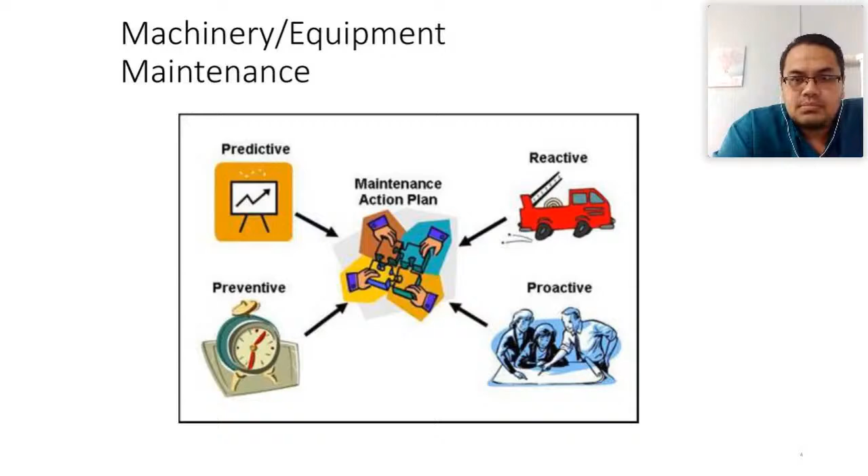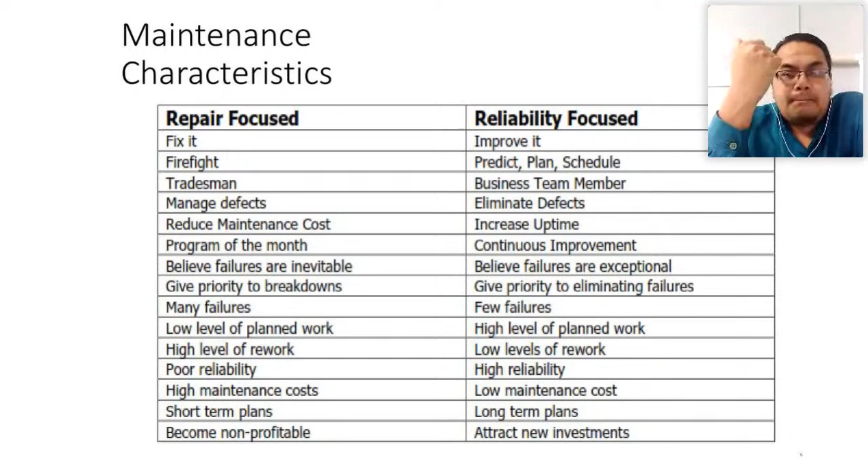Okay, Mr. Haris, I will answer your questions later on. This is especially for the engineer level, manager level, and the policy maker level to have in their maintenance philosophy. You need to have a reliability focus, not just a repair-focused maintenance. Instead of fix it, you need to improve it.

Instead of firefighting, you need to predict, plan, and schedule. Instead of being a tradesman, you need to be a business team member. This is quite interesting, because if we're talking about a tradesman, the tradesman will do everything. But if you focus on being a business team member, you will try your best to secure your business. So this is quite good.

Another thing is everybody tries to manage defects. In the morning meeting, everybody actually tries to discuss how to manage our defects. Every department, every section, they only try to manage the defect, not to eliminate the defect. So this is an important thing to ponder.

Another thing is to reduce maintenance costs. Sometimes when it comes to the budget challenge time around August or September, finance will try to reduce the maintenance cost. Then the senior manager says we need to reduce the maintenance cost. That is so repair-focus minded. What you must do is actually focus on how to increase uptime, how to increase reliability, how to increase availability. That is actually better if you have that kind of mindset. So this is something for managers and engineers to think about, not just go for repair focus, but start for reliability focus.

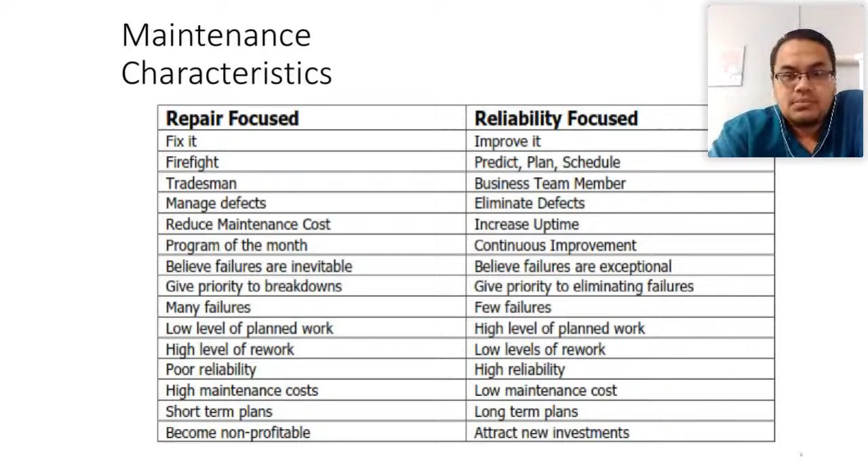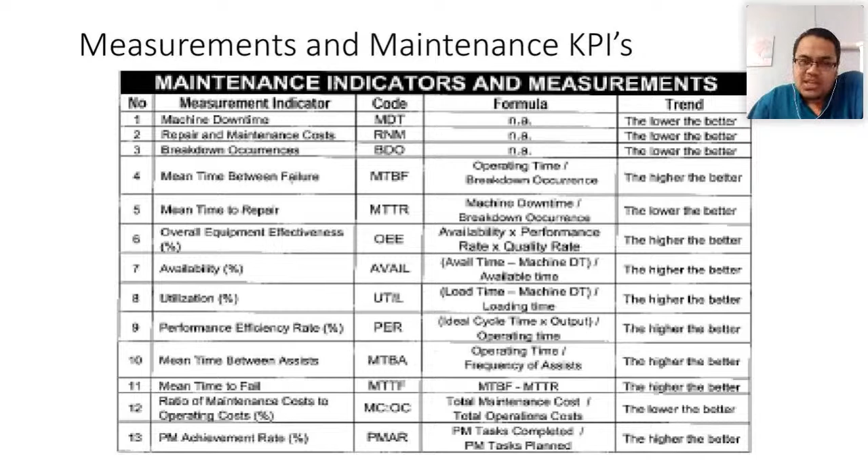Let's take one popular KPI, mean time between failure. This is the classic KPI that a lot of industries use. You try to measure the mean time between failure of your equipment. The higher the MTBF, the better. So when you introduce the PM, you want to see the MTBF go up. Then there is another failure, you come back and do some analysis, you do RCA and so on, then you introduce a new set of maintenance regime. Does this new maintenance regime give you higher numbers compared to the previous one? That's how you measure your PM, as an example.

Okay, this comes from DuPont.

Okay, this is from DuPont. You can see the prediction of failure, the last one. This is a lot of KPIs from DuPont, but I want to emphasize or stress the last one, which is prediction of failure.

The PPM work, preventive maintenance work, more than 20%. And PPM schedule compliance is more than 95%.

This is something you need to be clear of, especially for your subordinates. The KPI that needs to be measured is the percentage of how much PPM work needs to be done. It does not include the predictive here, but somehow you can put it here.

So how much preventive work, how many percentage of preventive PM, probably more than 60%. Then you have predictive more than 20%, emergency probably only 5%. That is why I'm talking about the maintenance philosophy just now.

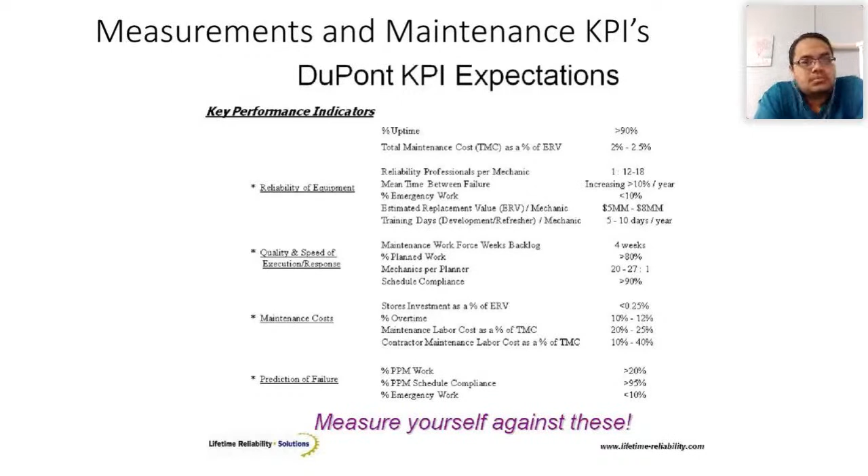So this KPI mostly comes from the manufacturing industry.

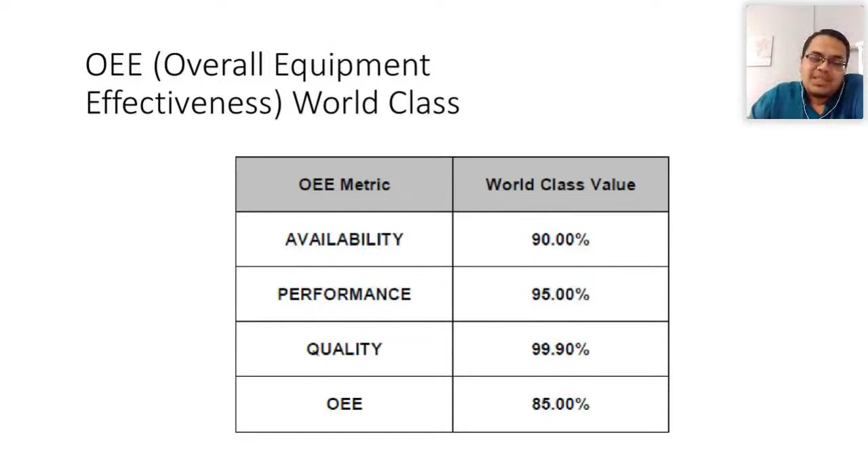Later on we will see how to produce a good PM regime or a good maintenance regime. The process is actually a never-ending process, because this year probably you have 4 new defects that you found, compared to last year where there was only 1 defect. So by doing some analysis, you probably want to renew your maintenance regime. This means each year your maintenance regime needs to be renewed.

There is no such thing as one maintenance regime for 25 years of the plant's life. There's no such thing. The maintenance regime needs to be reviewed every year or every 2 years at least.

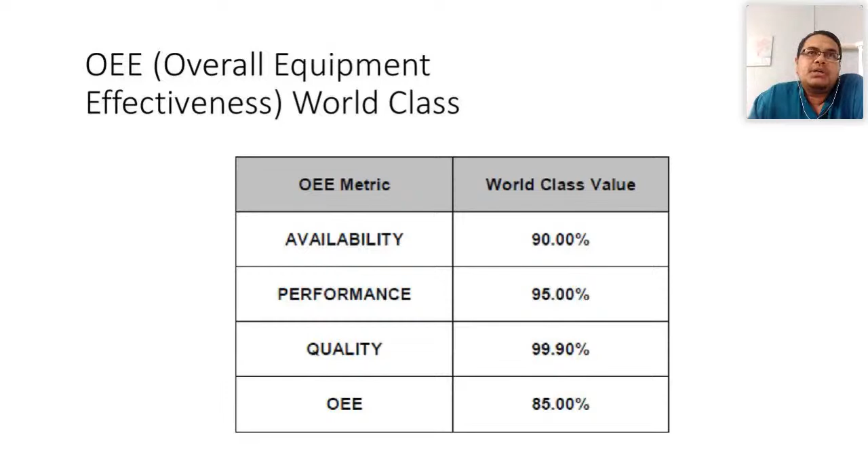So that you can increase your MTBF and your MTTR. To give a specific number is quite hard because the industry is different. Take as an example a simple crusher or pump in a harsh environment like a fertilizer environment.

The bearing probably would last only 12 months, compared to a pump in a clean environment, whereby it could go for probably 3 to 4 years. So the idea is you must renew your maintenance regime.

We will see later on how you analyze all these maintenance things, all this risk-based maintenance. As long as you have this kind of thing, you have the committee, you have the team, to renew this, you are in a good position. So to give an average of MTBF or average of MTTR is quite difficult. It actually depends on your industry and how proactive you are in renewing your maintenance regime.

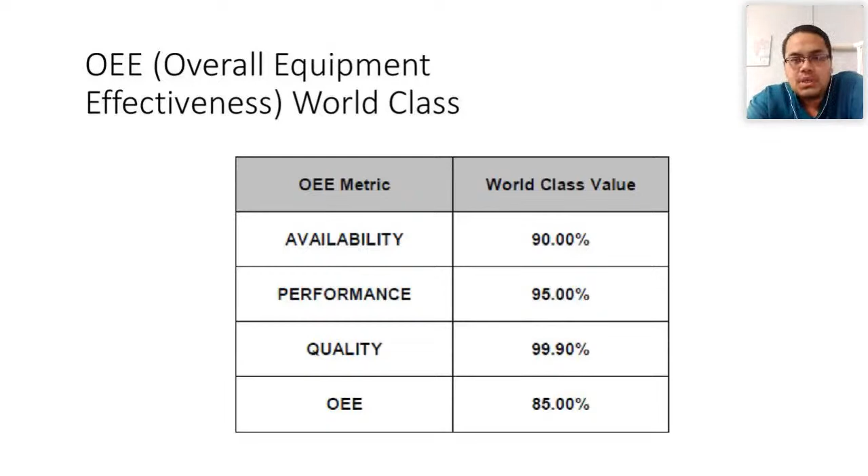There's a question from Mr. Muhammad Asha: with the economic effect of COVID-19, there is pressure to focus on costs rather than follow through the correct maintenance regime. Yes, okay.

That's why we go through the RCM process. Probably, Mr. Asha, you're familiar about RCM, reliability centered maintenance, whereby we try to slash out a lot of unwanted maintenance things, maintenance tasks, inside your maintenance regime. We will see later on how this RCM will help you.

Of course, I totally agree with you. It's not because of COVID. Only this year COVID affected maintenance, but last year a lot of things also actually affected the maintenance cost. It's not just this year. Every time, maintenance being projected as something that, you know, is a liability of the company. Some of the finance managers see maintenance as actually a waste of money. So it's not just COVID-19. I think for the past probably 20 years, maintenance has always been seen as waste in a company, and they try to reduce a lot of cost for the maintenance. So no worries, we will discuss a lot on RCM and how you can cut the cost of the maintenance itself.

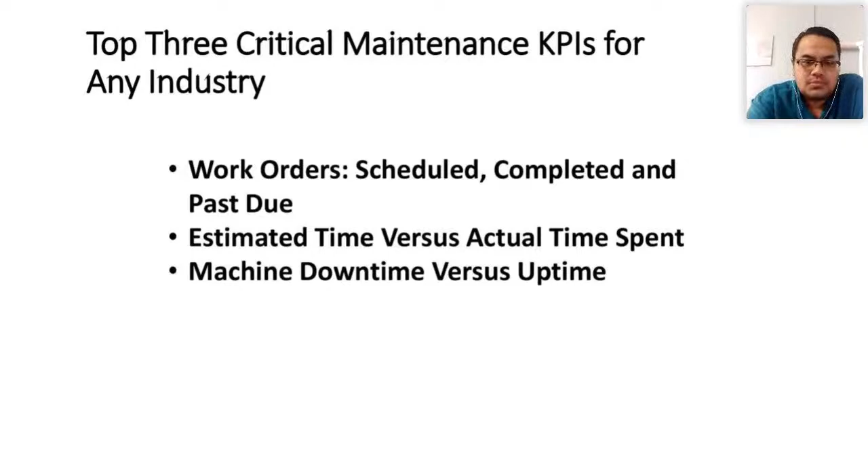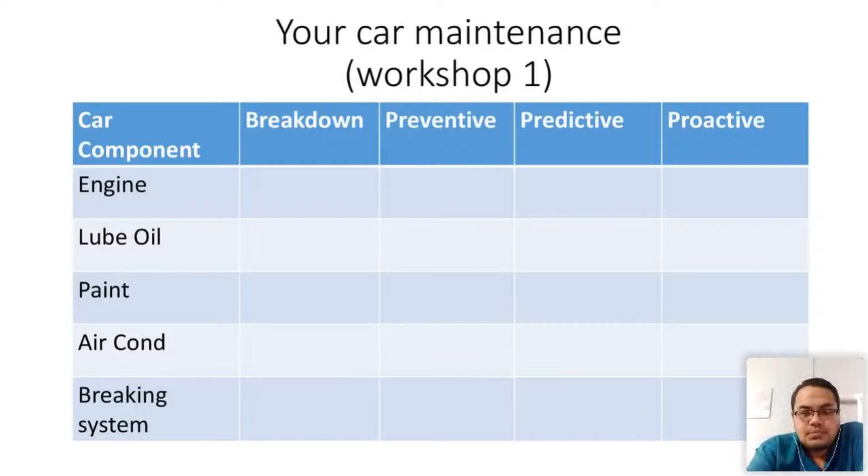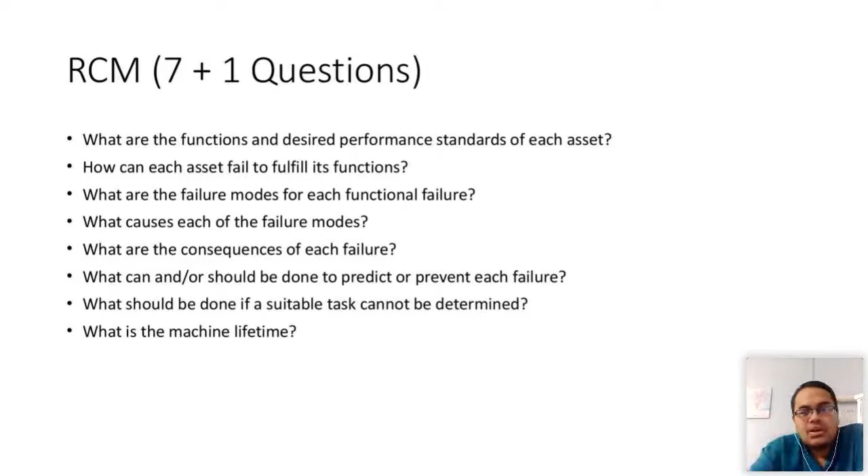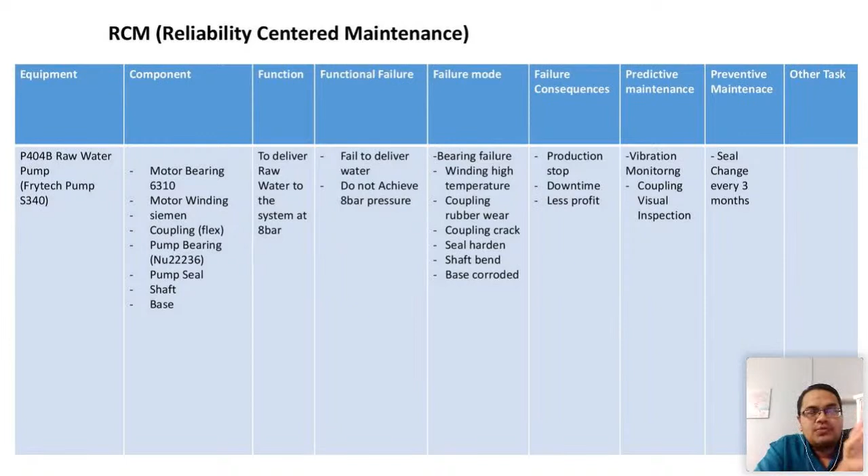Okay, so this is the way RCM works. Of course, there are a whole lot of steps to do this, but this is more or less the big idea of RCM. So RCM is some sort of tool that you use to analyze or renew your maintenance regime.

Any question for this slide? Probably it's not clear, let me know if you need me to clarify anything.

Let's take another component, which is the base. The base usually will fail through base corrosion. So base corroded, how do we do it? We go for visual inspection. We can perform the visual corrosion inspection for the base, so there is no need for preventive maintenance.

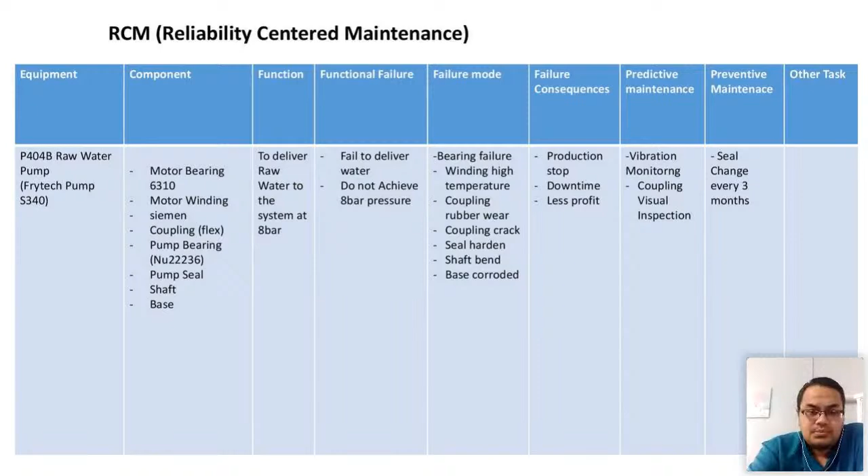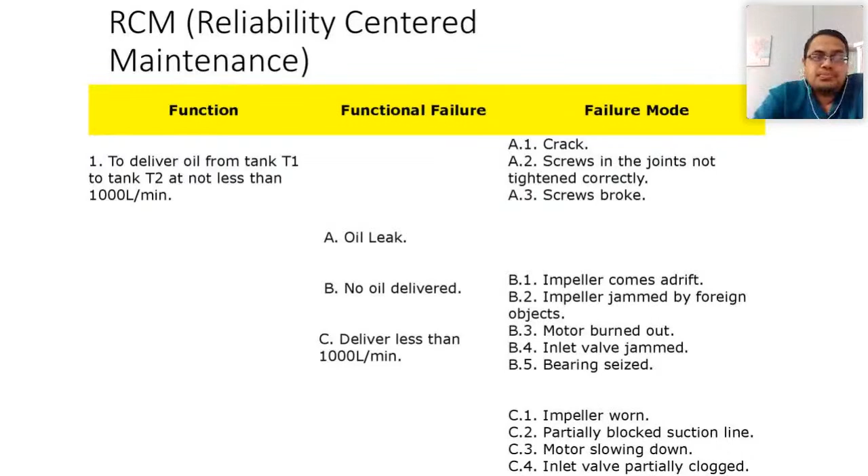This is more or less the template for how you perform RCM, where you have a whole lot of equipment, like a circuit breaker, then the components inside it. What is the failure, the functional failure, the failure mode? Then what is the best predictive maintenance available? If not, you move into preventive maintenance.

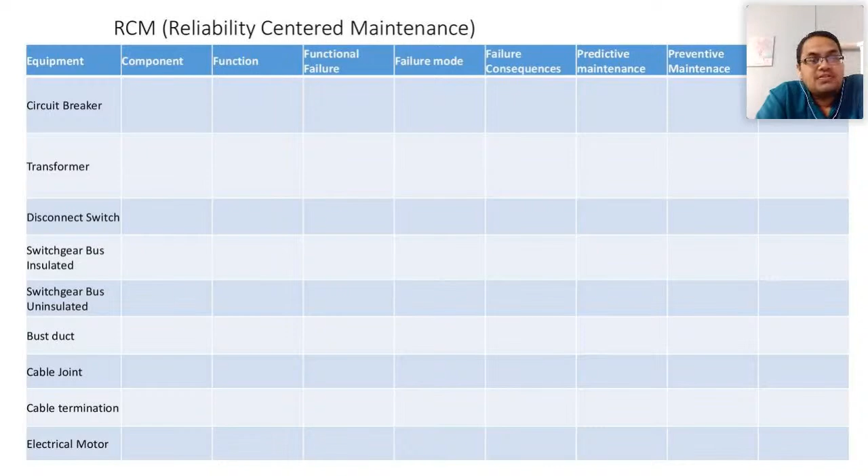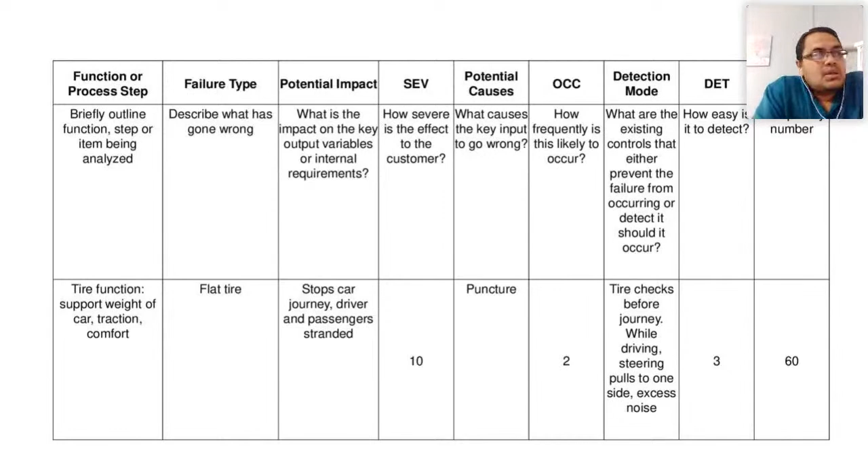So what happens in FMEA? You have a function or process step and you have a failure type. This is the failure type you're talking about, the failure mode. Still remember the RCM failure mode column? We take a simple example, still a car example. So the failure type is a flat tire.

So what is the potential impact? The potential impact will stop the car journey, and drivers and passengers will be stranded. What is the severity? The severity is 10 out of 10, worst case. Then the potential cause is a puncture. OCC is occurrence or likelihood, which is only 2, meaning it's not frequent, how often is this likely to occur.

Then the detection, how do you detect it? Tire check before journey, or while driving the steering pulls to one side, or you hear a noise. So the detection is easy, the number is 3, meaning it's easy to detect. So you multiply everything, 10 times 2 times 3, you get the risk priority number, 60.

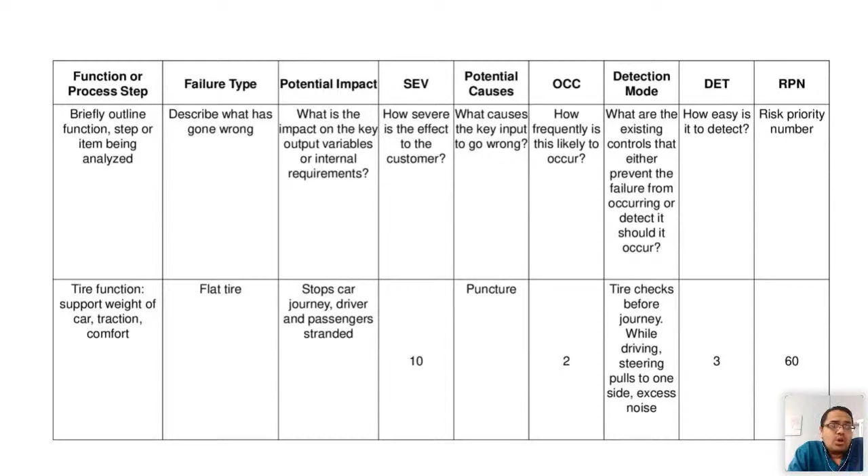The idea is to bring down the RPN. Right now it's 60, you try to bring that number down to a lower number. So what you do is introduce the recommended action. In this case, the recommended action is to carry a spare tire and appropriate tools to change the tire. So who is responsible, the car owner? You have a target date, you have the action taken.

So by doing this, you will have a new severity. Instead of 10, it goes down to 4. It means that if you have a spare tire inside your trunk, probably you won't be stranded too long, instead of 3 hours, maybe only half an hour. So severity goes down to 4, occurrence still stays at 2, and detection still 3. Multiply everything, 4 times 2 times 3, you get 24 for RPN, instead of 60 just now, now brought down to 24.

Now let's say you want to bring down the detection number. Probably your recommendation is to put a sensor, maybe a pressure sensor, which will make your detection method easier. So instead of 3, your detection method goes down to 1. So 4 times 2 times 1 leaves us with an RPN of 8.

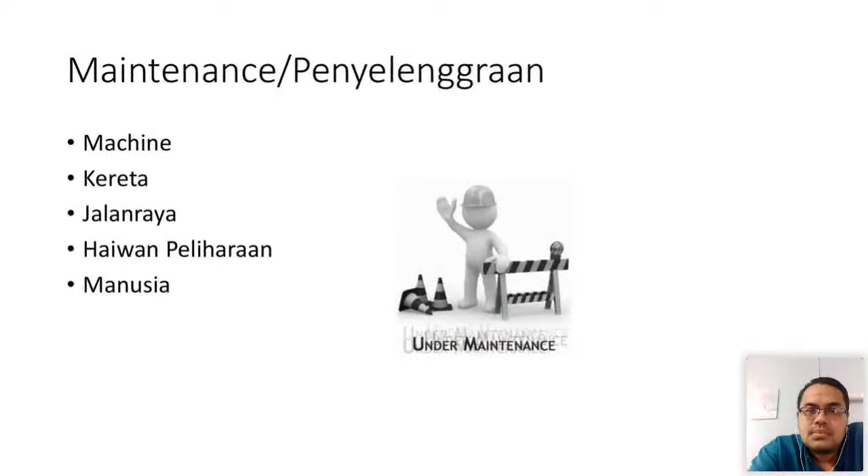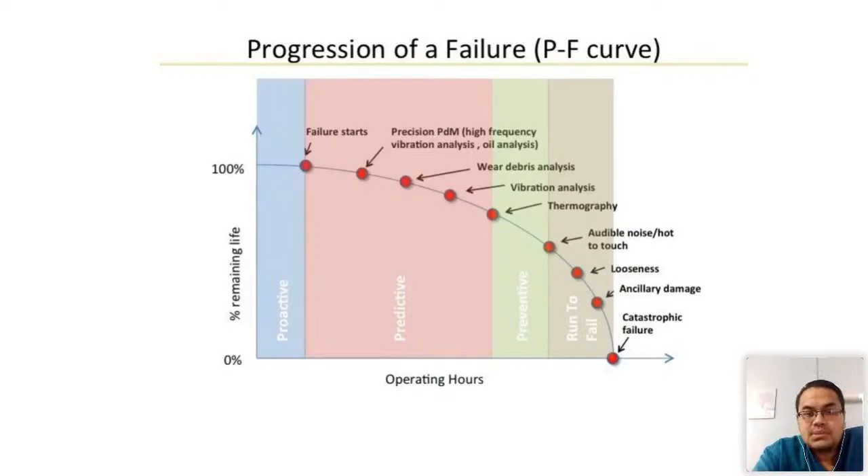Okay, so if you have more questions, probably you can contact Ayu, then Ayu will help you on that, and if possible, Ayu can facilitate you to contact me, or whatever platform can be used, so that I can help you, or we can discuss. I'm also eager to get your information, to get your experience, to share with you my experience, and your experience with me, of course.

Okay, any more questions? Do we have time?